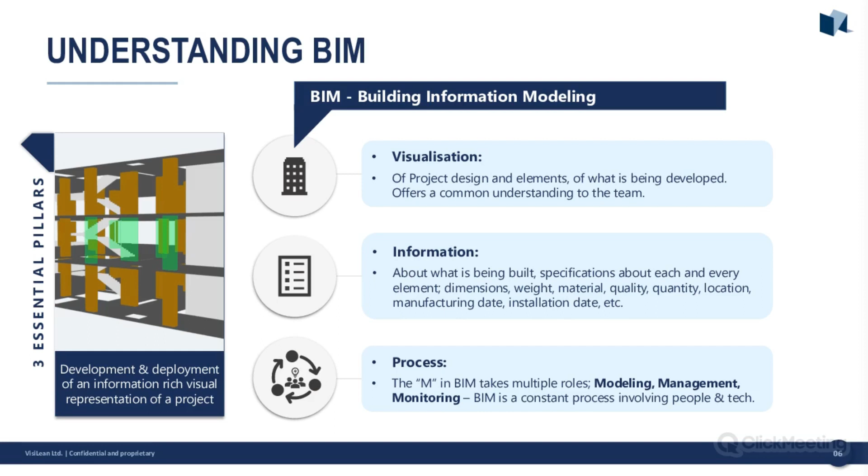BIM is a constant process that's always evolving. There's always new strategies, implementation, tech, and it's very important to understand that it's not just one size fits all kind of thing. It's a constant evolving process that you need to understand and continuously put a lot of effort in to keep staying on top of the latest trends and technologies out there.

So when you're implementing a BIM strategy, it's important to know the uses of BIM. So you've got the traditional visualization through a 3D model. You can have bill of quantities. You can have certain properties and specifications related to your models. So if you are doing a handover, then that could be important for things like facilities management. You can have location-based data on it. And then you can start to get into 4D, 5D with linking models and BIM strategies to time and cost and things like that.

So I just want to do a quick survey. Firstly, if everyone could just vote. Are you currently implementing BIM on projects? And the answers are yes, no, no but I'd like to, and yes but partially.

Okay, so we've got, I don't know if you guys can see this, but there's a wide spectrum here. Some people aren't using it. Some people would like to. Some people are using it, but probably not seeing all the benefits. And then there's people that are using it. Okay.

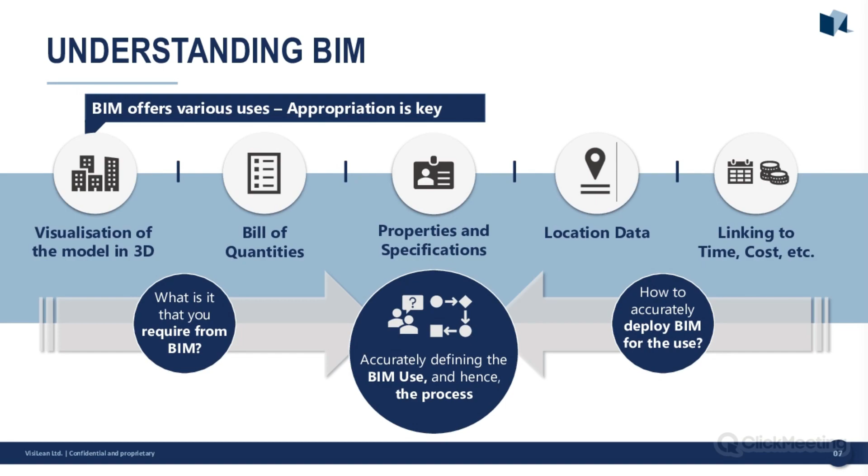So it's very important at the beginning of the project to understand what potential uses of BIM are and what you want to get out of it. I mean, is it really relevant to you to do energy simulations, or is it important for you to do clash detections? So that's all something you need to sit down with the stakeholders and really pinpoint what exactly it is you think you'll get the most benefits and value from using BIM.

Just quickly, last one. What ways are people using BIM? So 3D visualization, that should say clash detection, quantities, 4D simulation, other uses.

I would love it to do clash detection. That'd be really handy, actually.

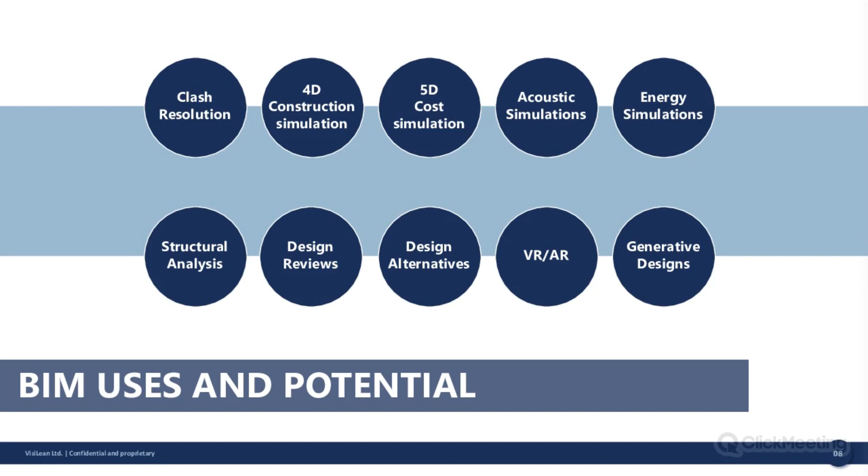So some of the challenges when adopting a BIM strategy in construction are pretty similar to any challenge you face when you're trying to bring something new into a company that has worked a certain way for so many years. So with BIM, I think there's a misconception that it's limited to only complex projects, when that's not really the case. BIM can be used in all sorts of projects, simple to complex. I think it's actually probably beneficial to use it on a simple project to begin with, so you really understand the process, you get everything aligned, and then you can take it onto a more complex project.

There's incomplete stakeholder involvement and vendor support. So, like we've said in loads of previous webinars, people are working in isolation. People aren't really sharing that data. We've been to loads of construction sites where they do actually have BIM models, but only the people that made those are actually using them. So the teams on site never see them. They haven't really had the involvement from everyone in that information process to really generate models that are very specific and help everyone.

Then we've got limited demand for BIM-driven project delivery. So there's a tendency to hire external BIM consultants. So that comes with its own issues. Are they really going to have the buy-in of the project? Are they really going to care as much? Are they really going to understand everything? Then there's limited input from clients and authorities. So you've got a BIM model, but have you really spoken to the client about what would generate value for them, or what they would want to get out of using BIM, or how can BIM really maximize their value?

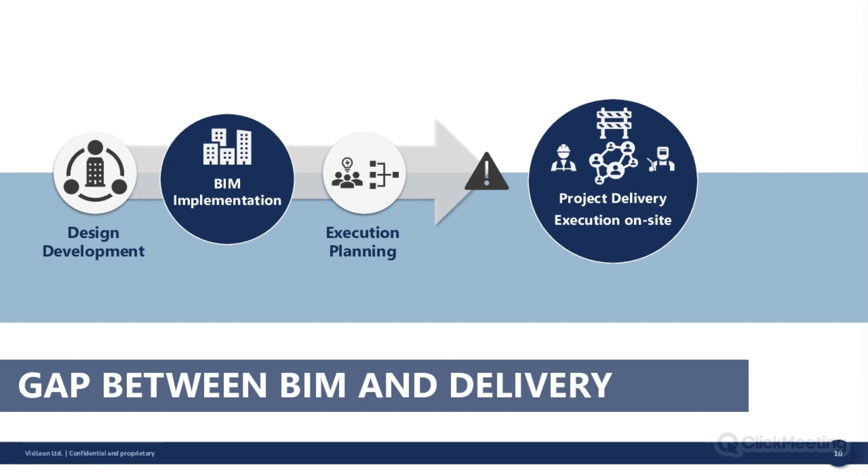So this is just an example. We showed this previously when we did the webinar on Lean implementation. So Lean and BIM philosophies are aligned. So whether it's visual management, whether it's production planning or visualization through 3D models, BIM and Lean allow people to visually and efficiently schedule works, do clash detections, and provide a very common language for everyone to understand. It becomes a very powerful visual tool for people to understand progress and to do things in construction.

The use of Lean tools like big rooms and the last planner system allow people to collaborate. And also with BIM, it allows early contribution for all stakeholders in a project. So you don't have to wait till the project's coming out of the ground to get the MEP guys to start doing clash detection and things like that. If you have relevant BIM models and strategies and information, people can come on site a lot earlier, and then we can start to reduce that waste when we get to site, because hopefully we'd have done a lot of clash detections and problem solving before we get there.

And I think we're going to show a case study later, but those big rooms where you have a screen, you can get everyone in, you can go through the models, you can go through any sort of data and information, start doing simulations, allow for that real collaborative environment where people can get involved early on.

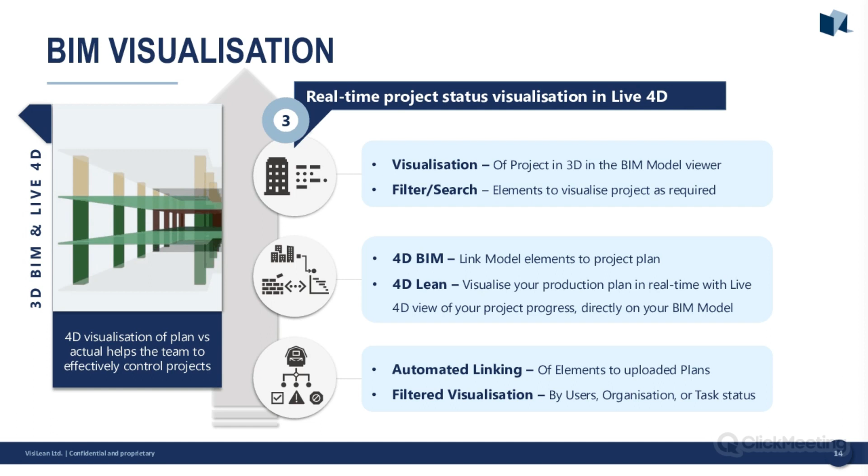And then again, we can filter the model by users, organization, or task status. So again, what we're trying to do there is get rid of that non-value adding activity of navigating through it, searching for things, where we've got specific filtering so you can get the information you require as quick as possible. So we're not wasting any time.

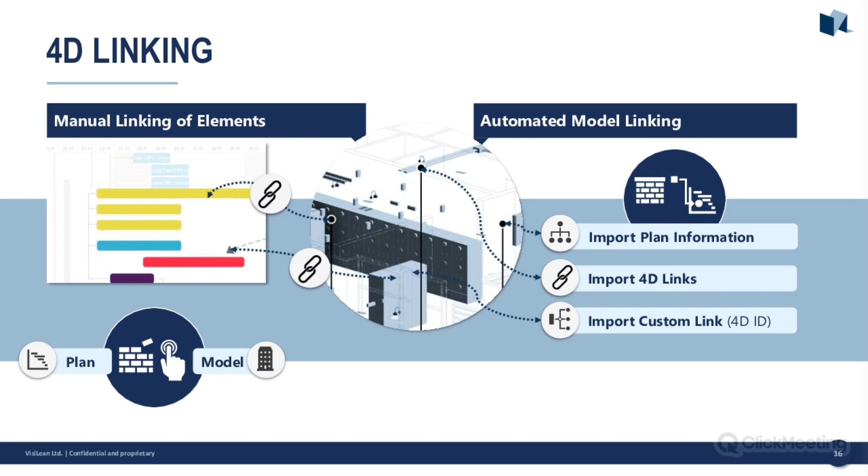Now, what's important when you are implementing a BIM strategy or getting models made is you make it relevant to the work you're doing. So you might want separate MEP models or a structural model, or if you're already working at 12-week look-aheads, you probably won't need a complete model. So you might just want a model relevant for that time frame. So it's very important that that strategy is done at the beginning, because otherwise you can have models that end up being not relevant or too clunky or hard to navigate.

So if that's something you need help with, that's something we can do as well. Coming up with that whole aligned process so that the BIM is aligned with the production and the planning. Because otherwise, if things are being done separately, people working in silos, it's not going to be efficient, and the only thing that's going to be wasted is time, effort, money later on in the project to fix that problem.

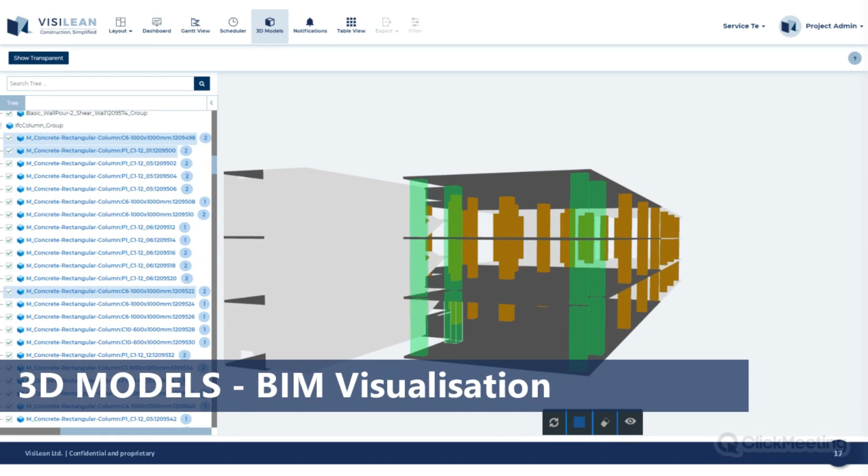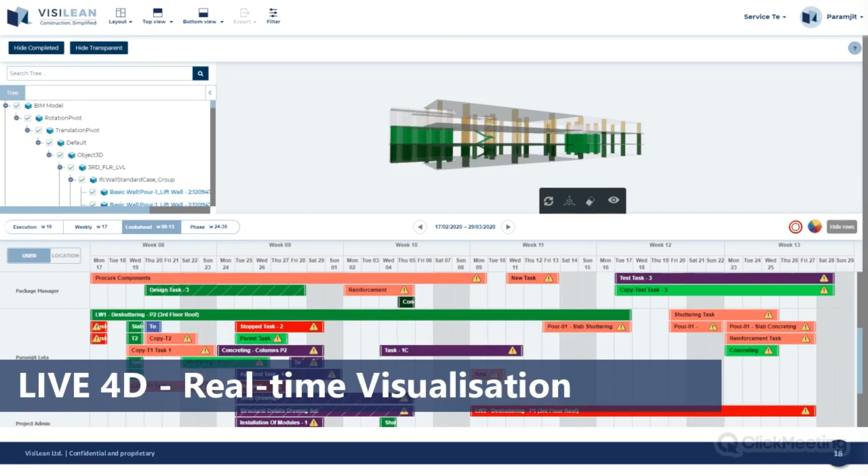Anything that's green means it's done or complete, or quality checked. If it's red, it means it's stopped. Pink means it's not ready. As and when you scroll through the dates, what's being worked on in that time frame will be reflected in that model. So it's a very visual, powerful way of seeing the status of the project in that time frame.

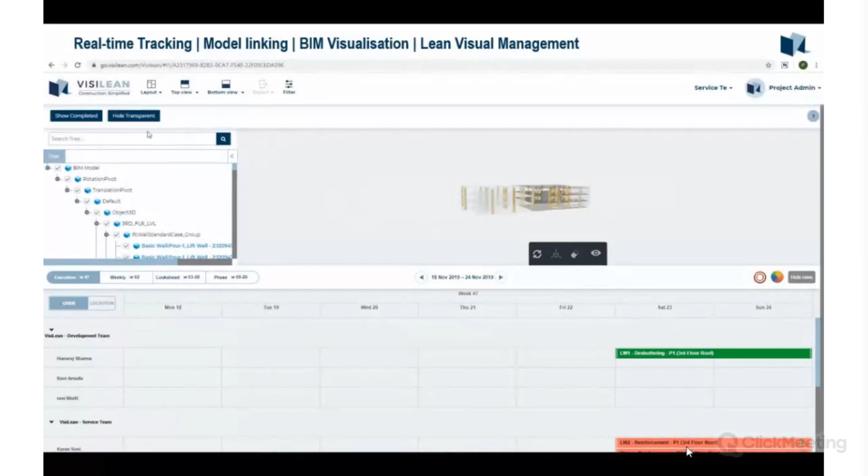What we've got here is just an example of how you would do it with VisiLean. So we split the screen 50-50. Now we're filtering - we've pressed show completed, so only what's being completed in the project will be highlighted with those green colors. Now we're filtering it by the rest of the statuses: pink means it's not ready, yellow means it's unassigned, and purple means it's started.

So what we can see here is if I was looking at, for example, next week's dates, and I could see there were some pink items or yellow items - pink means it's not ready, so I know there could be an issue there. And yellow means it's unassigned, so again, that could cause an issue. If it's next week and it's not been assigned, has someone got everything ready - materials, tools, checked the space, everything. So it's just a very quick, easy way of looking at a project and understanding the status.

Then if I look at the bottom half of the screen, I can see the days of the week it's due to be worked on and the team responsible and the employee responsible. So just by glancing at this screen, I know the status, I know what the actual project should look like, and I know who's responsible for something and when it's going to be worked on.

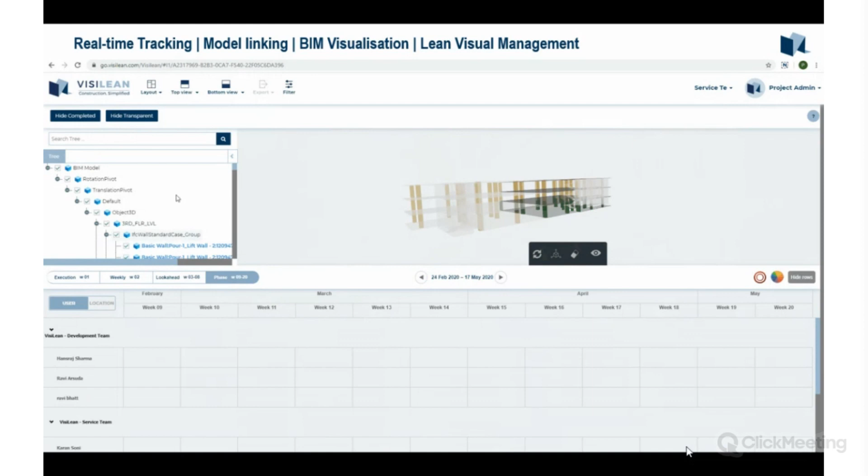Then you can click on the task and go into a bit more detail as to the history of it, why it's not ready. You can change the status. You can leave a note if you now want someone to prioritize this.

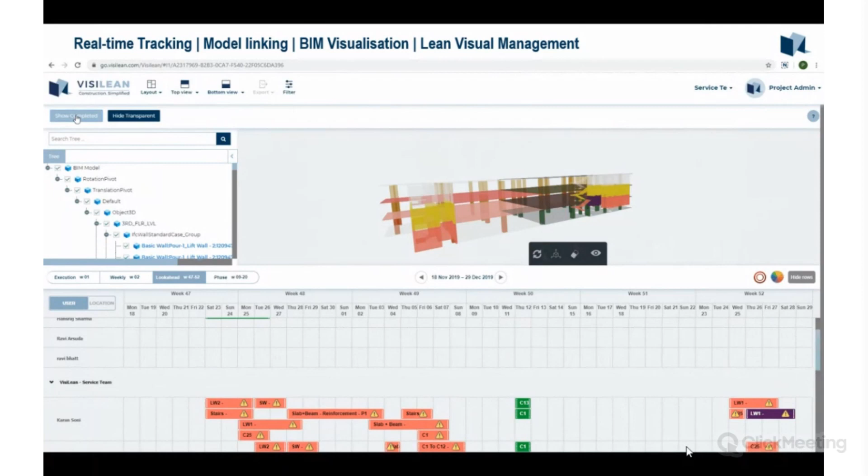The software is designed to be as easy as possible to use. So you don't have to be, like I said, a planning expert or Revit expert to be able to use it. It allows everyone in the project to navigate through this as simply and easily as possible, in a very visual, common language that everyone should understand. So after using VisiLean for about half an hour, you should be able to understand the color codes and everything like that.

So this is a case study from Mace over in Dublin, who are building a data center where they implemented a lean BIM strategy. What you can see here is that screen split 50-50. At the top, we've got the model, at the bottom we've got the production plan. So those tasks are pink, which means they're not ready. Just by looking at the model, you know straight away which parts aren't ready and which need to be actioned, and the make-ready process needs to be followed.

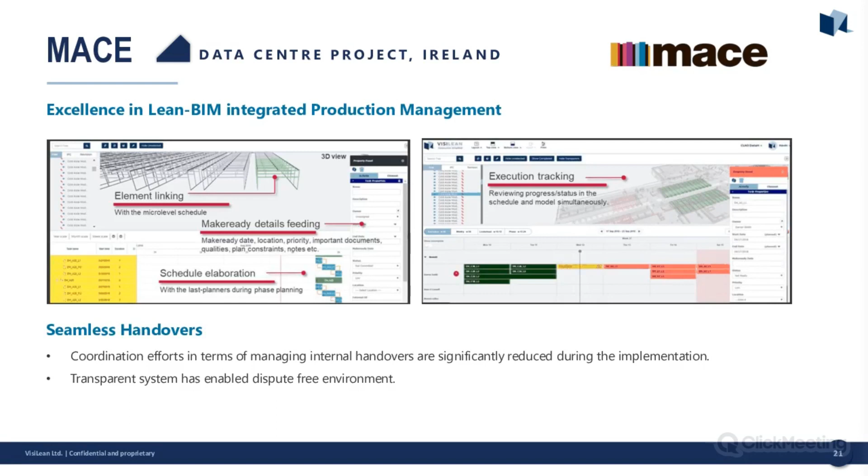Now, on this project, they had parts of the project which were being manufactured off-site, where they used a lean BIM strategy to follow the production all the way from factory to site. So it was a very visual, powerful tool to understand exactly whether things were ready, whether they're not ready, when they were being installed. They used one of those big rooms with big screens and got everyone involved, understanding progress in a very visual, collaborative environment to help work on the project.

Now, they built 3 data centers, identical. Correct me if I'm wrong - I think Kevin's in here. The first one they used kind of manual tools, and on the 3rd data center they used VisiLean.

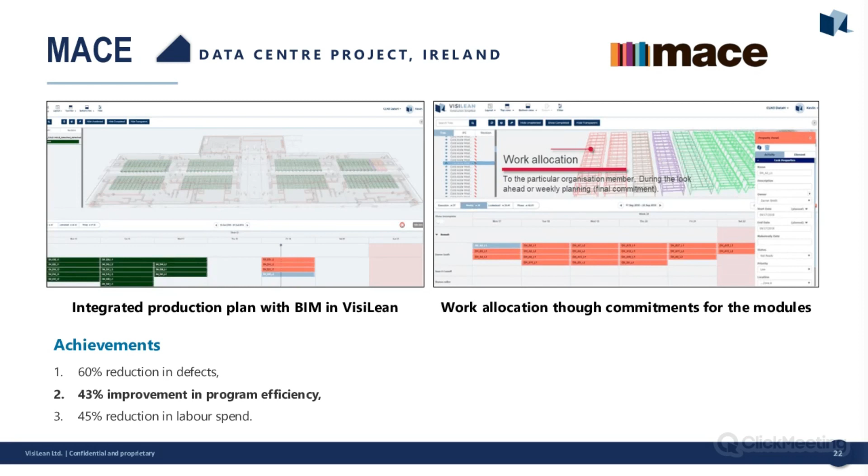Some of the achievements were a 60% reduction in defects, 43% improvement in program efficiency, and 45% reduction in labor spend. They went from building the first one in 21 weeks using manual processes, to the third data center, using VisiLean and a Lean-BIM integration, built in 9 weeks.

So you can see the benefits. If you have the right kind of project, the right team, the right technology, people, and everyone, and you implement the right process, the benefits of a lean BIM digital solution can be huge.

So you're able to visualize the project in 3D. You've got much more efficient and collaborative production planning. The execution on site becomes much more efficient. You've got the data, live project updates, and live 4D progress visualization.

Like I said, you need the right people, the right strategy, and the right technology to implement one of these strategies effectively. Without one of those things, it's just not going to see the same benefits or succeed. That's why every week we go into not just what you need to do it, but how you need to do it, because that's just as important.